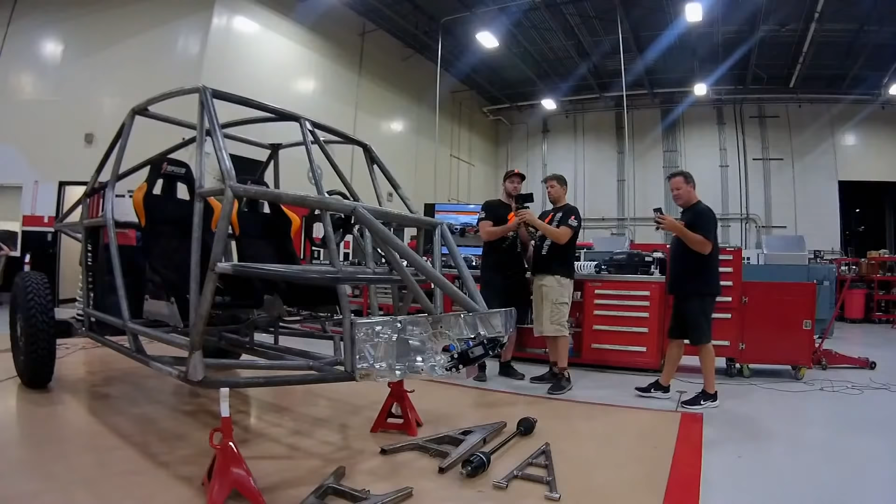This is a pre-production prototype part. Obviously a lot of engineering, a lot of things are put inside of it. We've got it split in half here, so you're actually looking down through the inside of it. You're looking at half of the steering rack. This is actually the steering rack that'll be on the Speed UTV. Hydraulic steering rack. And the reason for hydraulic is I believe that is the best way for an off-road application. The electric power steerings are getting pretty nice, but to be honest, the speed that this car is going to go compared to a normal UTV, we're going to need to have a little more stuff there.

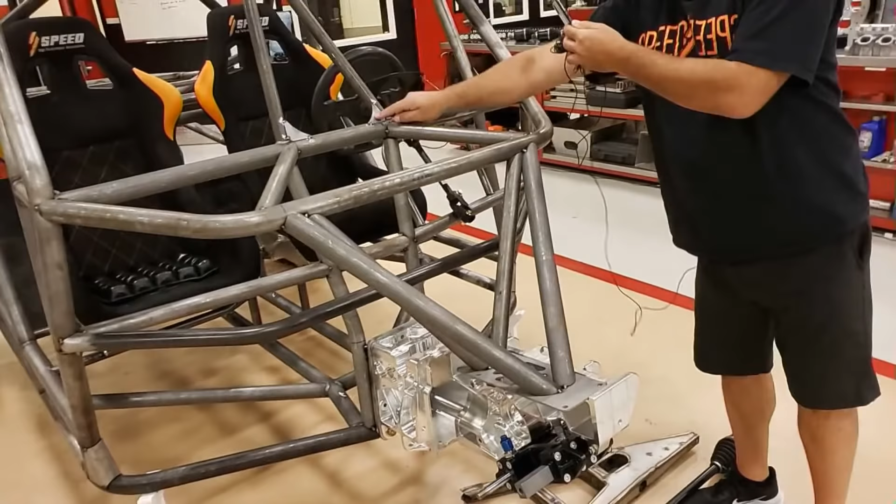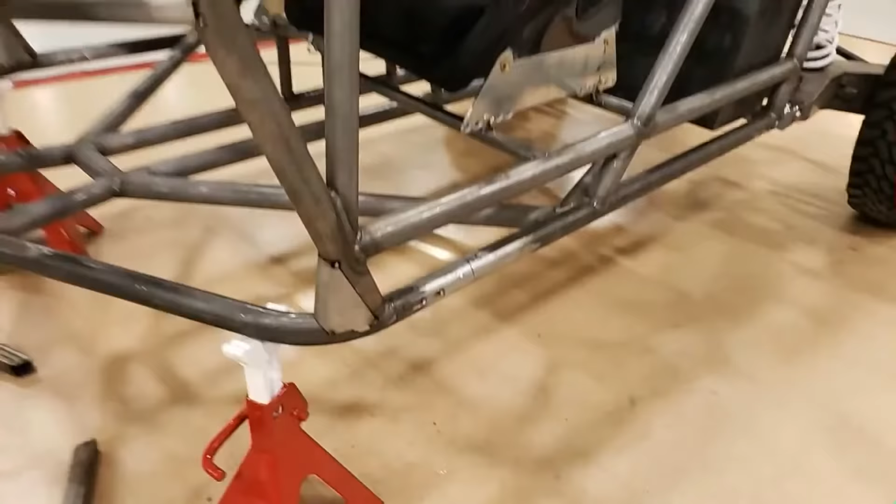One thing I'm going to walk around is front suspension. If you look at, we talk about chassis geometry, gussets, spine, the way it all links together. New to the UTV industry by a long ways is the A support bar, the A post being linked together and tied together. Big door opening. Daniel, want to grab this? I'll climb inside. This is what the production UTV will be.

As I go to climb in, I'll be able to come through the side door. A lot more room with your feet getting in here compared to what we did with the XX. But foot is definitely down low. The door will hinge off of this pivot point right here, swing open. A lot of room, a lot of headroom, a lot of comfort. Seats are mounted, as I said, there's a spine down the middle. A support bars, you look at this one, where are the tube connectors at? No tube connectors here. This is a purpose-built race car, but it will be the same as what a production car is. And this roll cage has been approved through Bill Savage.

With the exact gussets, yes. So the exact gusset kits, the way they want to see them. Corner roof gussets as well that hold on the roof. Feel really, really good about this car. These are the production RG seats, the seats that come in the RG edition. This air pad over here in the passenger seat goes inside this bottom seat cushion. And a lot of room, a lot of comfort. As you see, I will be reaching for full throttle. Lots of leg room. We've got a lot of dash room, but a very detailed out dash as well.

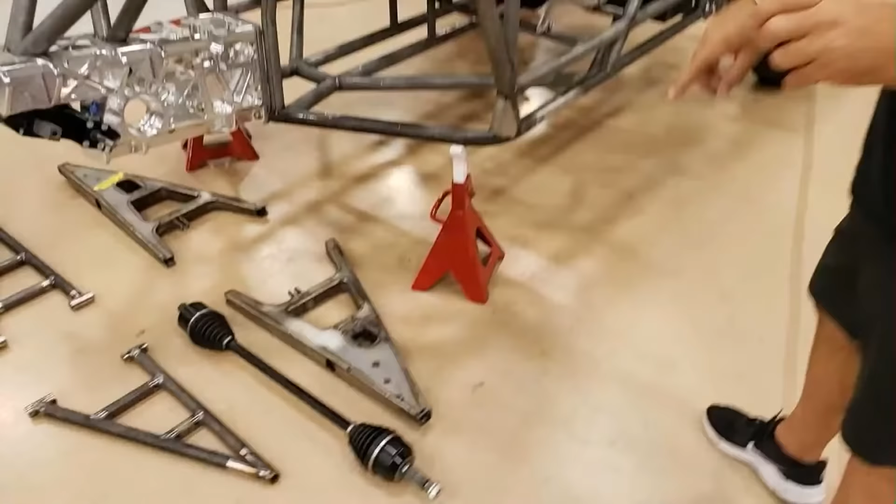Take my phone back. Walk you through some suspension components. So all the suspension components here, the outside misalignments have not been put on here. Waiting for some forgings to come in. Hopefully they'll show up here in the next couple days so we can finalize the lower A-arms. Axles are in. This is the big spline front axle to fit into the front diff. So that big spline on that locking mechanism.

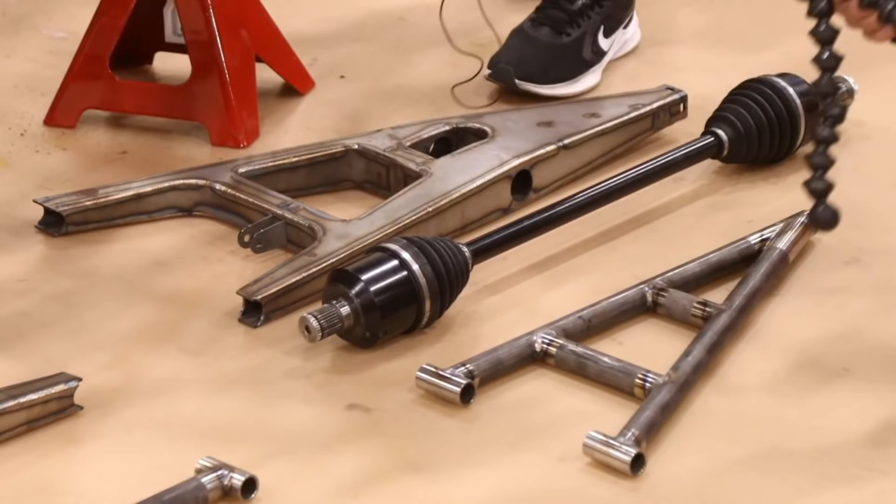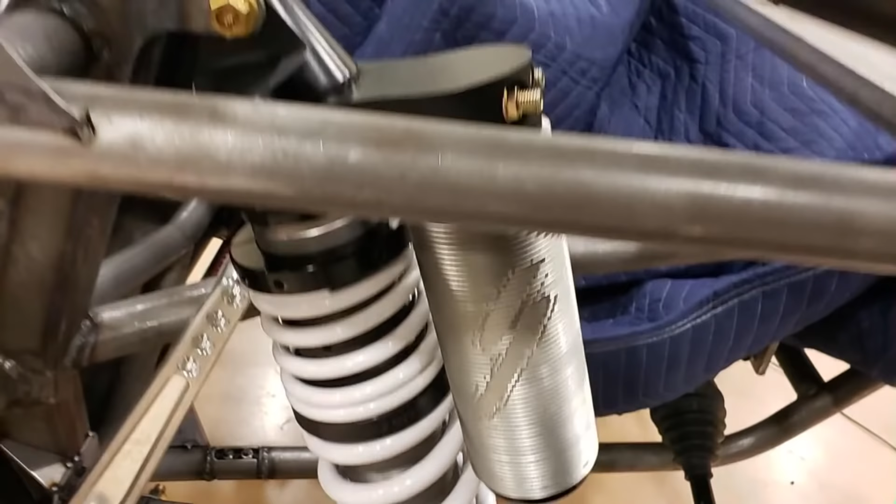Okay, pause, came back on. This one here has the fuel cell in it. This one's got a carbon fiber fuel cell tank. Anti-roll bar is mounted in this car. That will get adjusted down to where it belongs. Shock got put on before it dropped down. A-arms are on. Speed shocks. We do have pre-production shocks now in our possession. These are the production cast or forgings and extrusions. This is our finned reservoir.

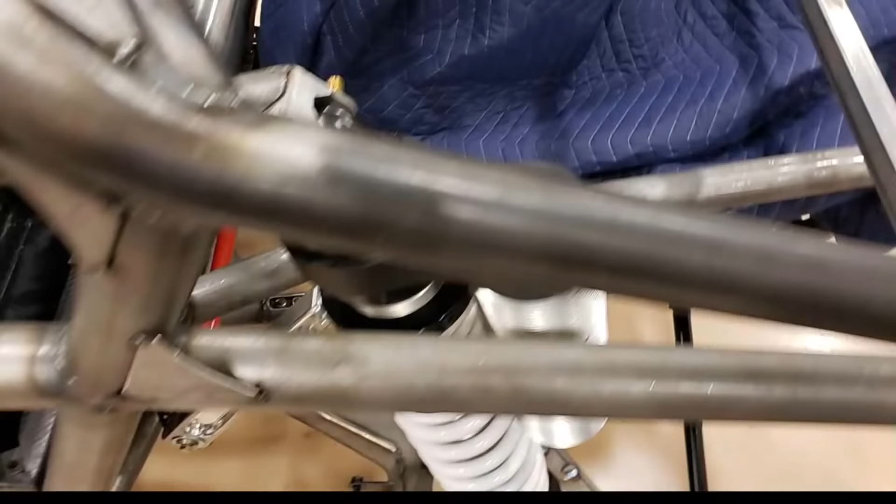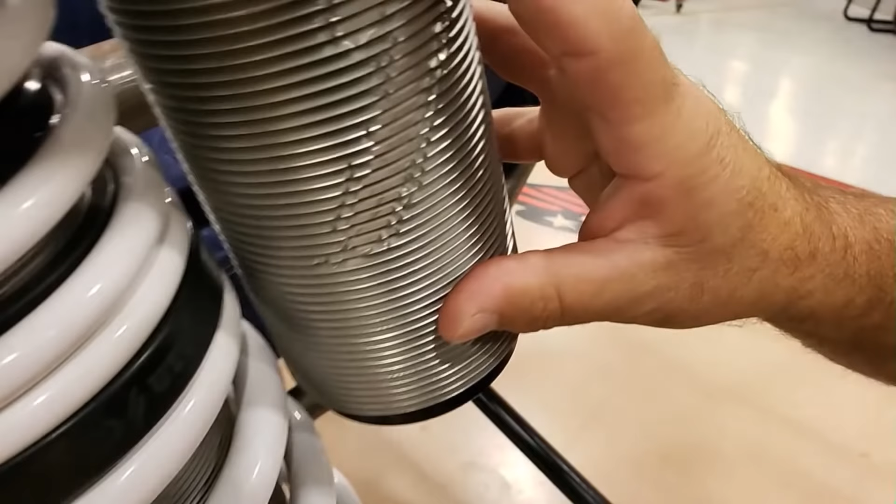Got to be very careful here. When we sent over the drawing, we sent it as a laser etching. This got actually machined, and pretty impressive that they went to the detail to machine the Speed S into the shock reservoir. But this is the shock that will be on the Speed UTVs. Black is a pre-production color. Orange will be the color of the Speed shock. That's the way we'll launch it on these cars.

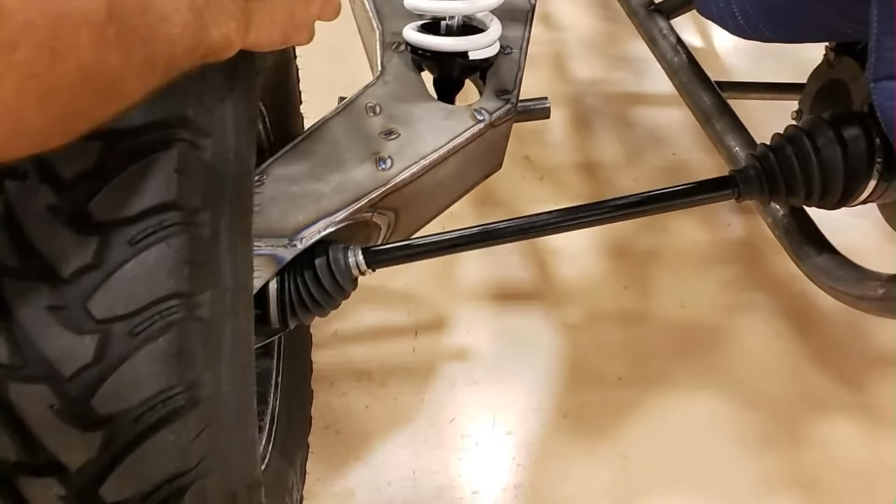Sway bar mounted back there. Double shear into the center of the trailing arm. So trailing arms are flippable. We're missing our shock pocket here. We know that when people question us. Shock pocket's not in here. We still got another 3 weeks before this car ships, but want to let you know that it is coming along. No, I will not uncover the cover. That is our engine, pieces of it mounted in the car. It's in a stage that we're not quite ready to share with you yet.

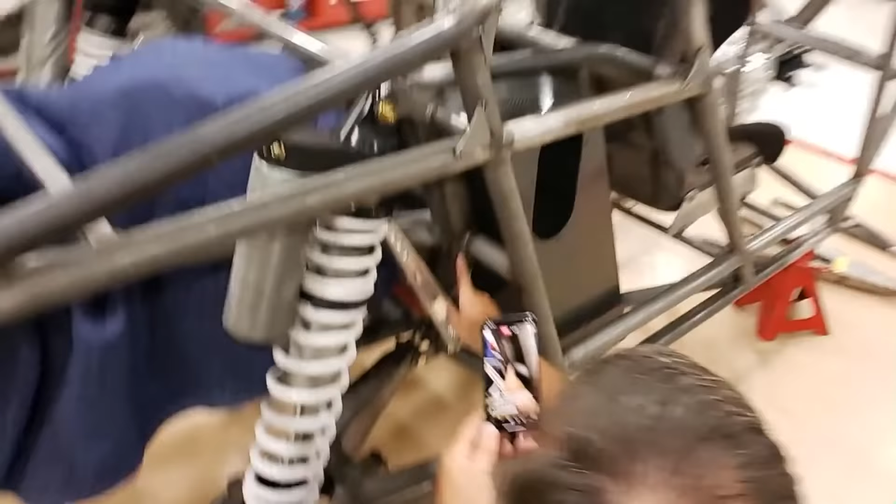Shock mounts. These sheet metal gusseted shock mounts will be in the production cars. This chassis is identical to what a pre-production car would be. All right, tube clamps are missing, but they will be in the cars, and they will be legal for King of the Hammers Racing, Score, and Best in the Desert, provided you weld up your seams. So they will be available.

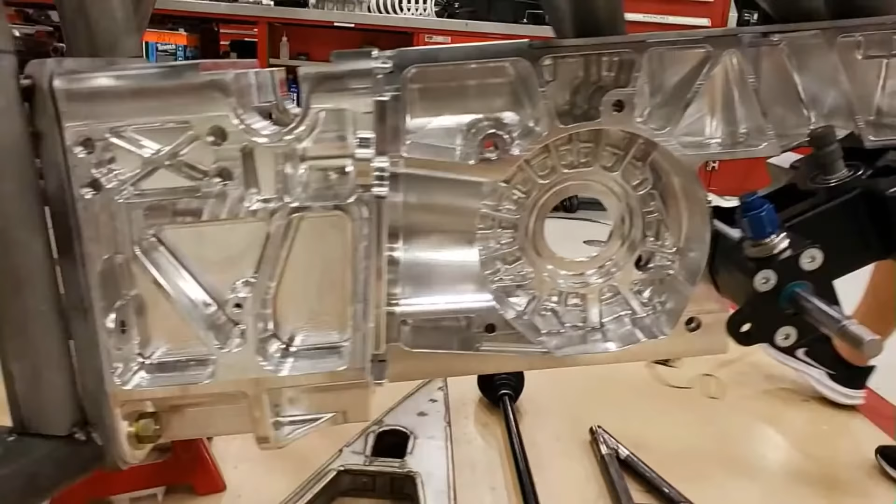So this car here is pretty special. I'm pretty excited about it. Like I said, I'll walk you around the front differential. This one's half, still waiting for that half to get to us. It was supposed to show up, but didn't show up. So we're waiting for that piece and all the internals for this gearbox. But it has to be running by UTV Nationals.

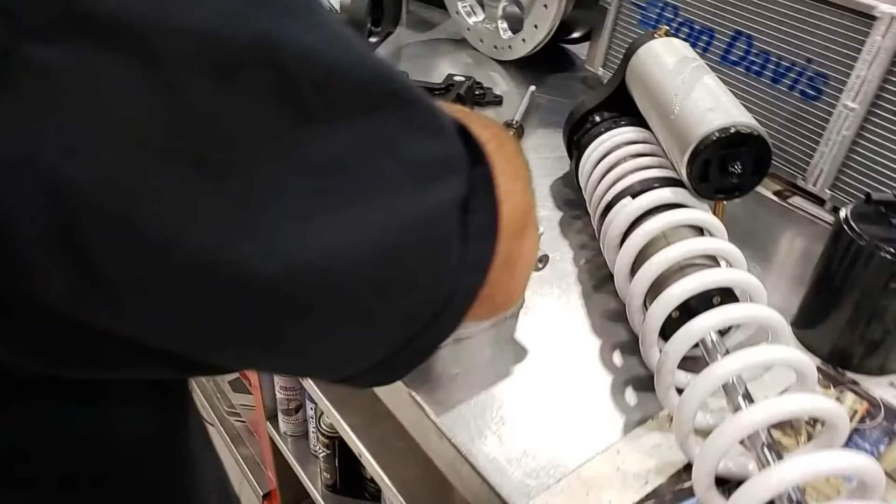Got to have it. How much horsepower? How many seats? Depends on what we feel is reliable after dyno testing. I'll have some engine stuff for you this week. Pretty excited about this. This is the machined cylinder head for the Speed UTV engine. You see the exhaust ports are machined.

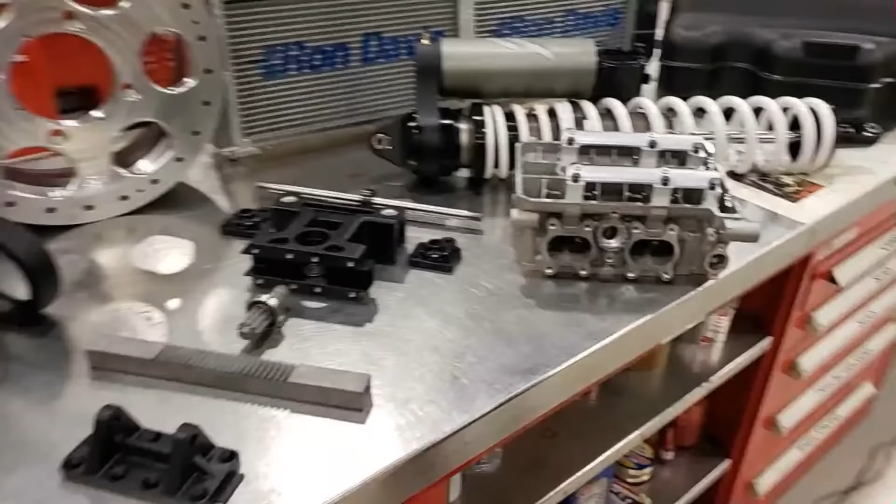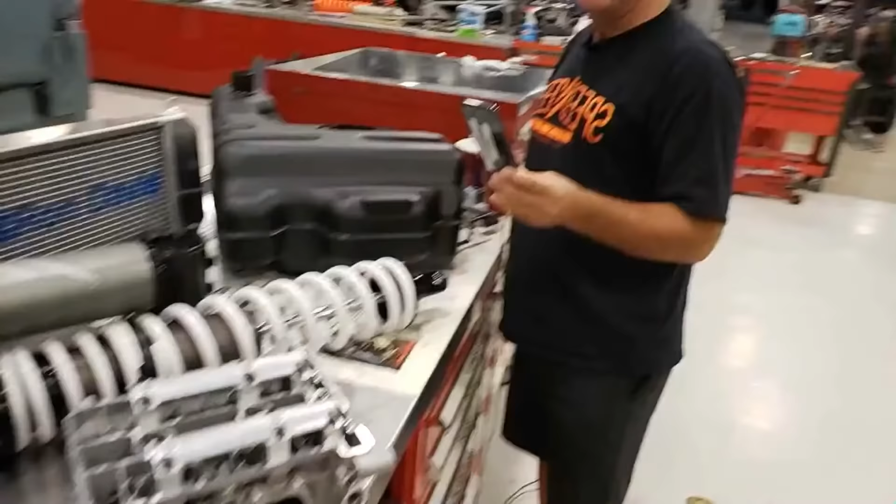So this will go to Joey Arrington tomorrow, who's doing our engine, as well as one will go to Craig Campton over at Hypersports. They are working with us on our production engine, as well as our pre-production testing stuff. How much power? Easy 300. And yes, they're 999cc, and we are pro turbo legal. So 300 horsepower, 3-speed sequential gearbox, no CVT.

Buddies at Ron Davis, this is the radiator for this car sitting behind me. It's here. This is the charcoal canister. So we do have our charcoal canister now. That is in a car at EPA CARB testing. This is another one of the shocks sitting here. So we've got plenty of parts and pieces.

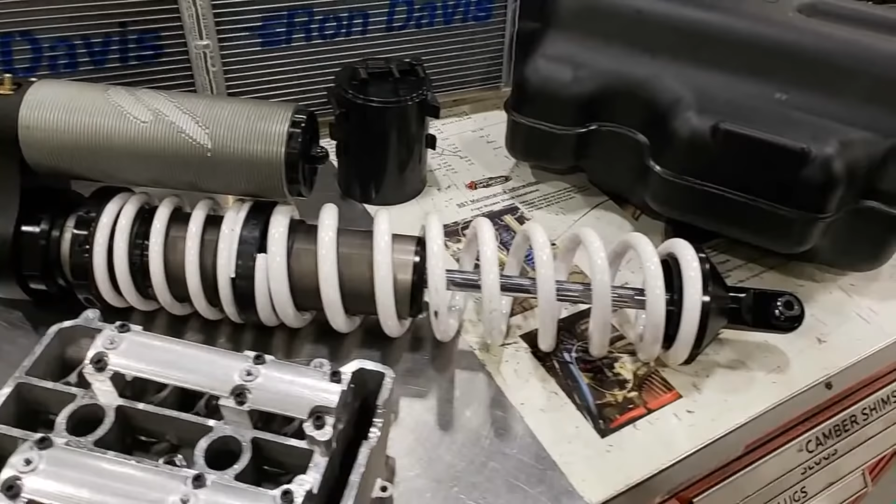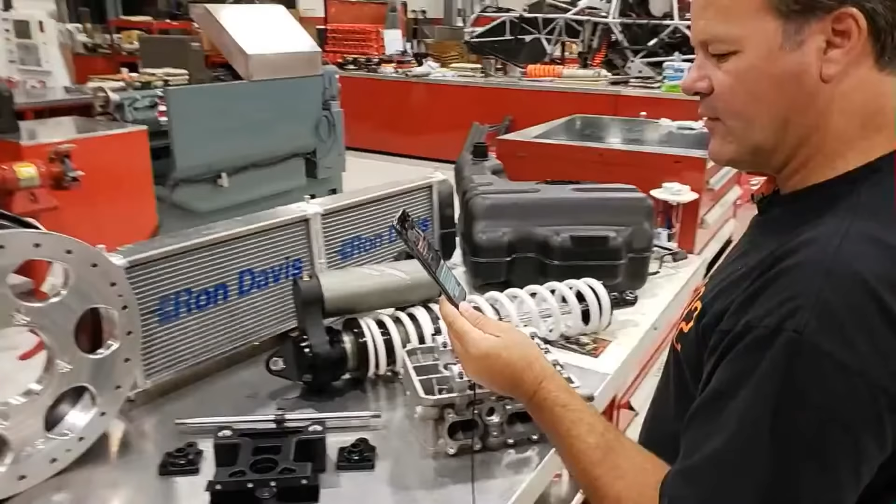What is the pattern and offset of the wheels? Well, the pattern is 4 on 156, and the offset is what we call what it should be. All right? If you're going to design a car and you're going to get proper kingpin inclination as well as steering geometry and maximum CV angle and length, you'd want a wheel like this. I started this flat face program with the Arctic Cat XX, and we took it a step farther with the Speed UTV. So 4 on 156, 6.5 inch wide wheel, 32 inch tall tire production.

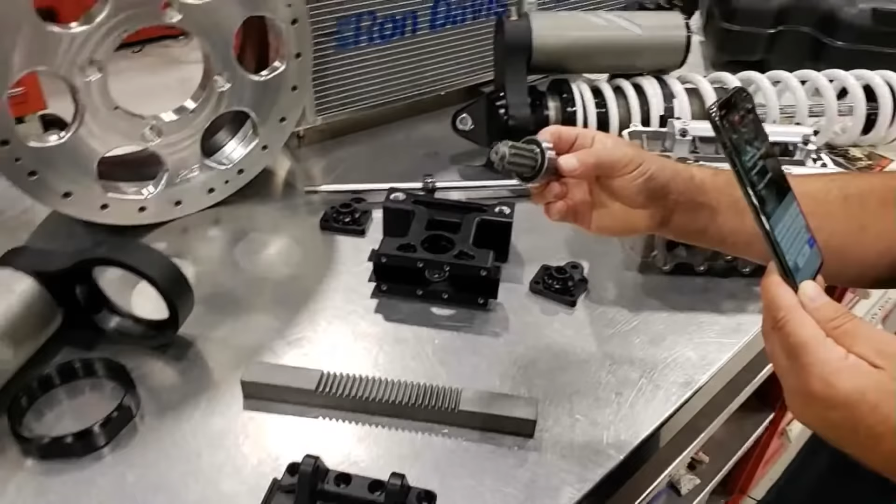Steering rack, hydraulic. I'll come over to the bench now, start showing you some components of the hydraulic power steering. Those are the 2 shafts and the piston. End caps. 1.75 to 1. We'd love to have 1.5 to 1, but we had to make a car that everybody could drive. I think 1.7 is still faster than anybody else in the industry. This is the steering rack. Steering rack looks a lot like a baby SST rack.

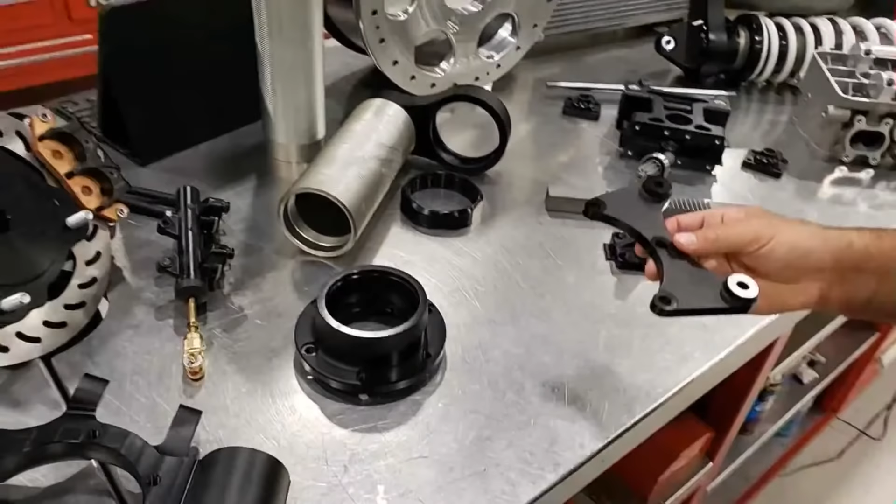As we're producing parts, we want to build stuff that's good. These are machined now, but those will be forged brake brackets. Nice part about this is these are some of the components that I wanted on the Double X that I lost the battle with. Nice thing about this is you can put this onto the hub assembly, and if you ever want to put 17-inch wheels on it, you can build bigger brake hats without building a whole assembly. Or you want to go to a Brembo or a Wilwood caliper, bang, all you do is do this.

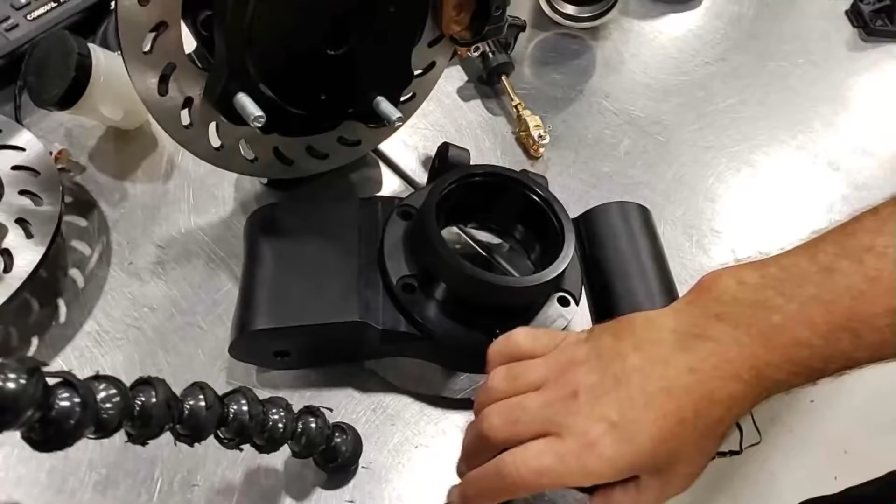This is the wheel bearing assembly that actually pops into the spindle. And the same hub assembly can go, whoops, on the back side for a right spindle and a left spindle over here. You see that the whole thing flips, the steering arm stays there. This is a complete production spindle. So when you look at the spindle and you say, wow, that's a really nice aftermarket component, that is our production spindle, guys. Double shear, front steer, patented. No ball joints, big bearings, same hubs front and rear, same bearings front and rear, brake caliper remote.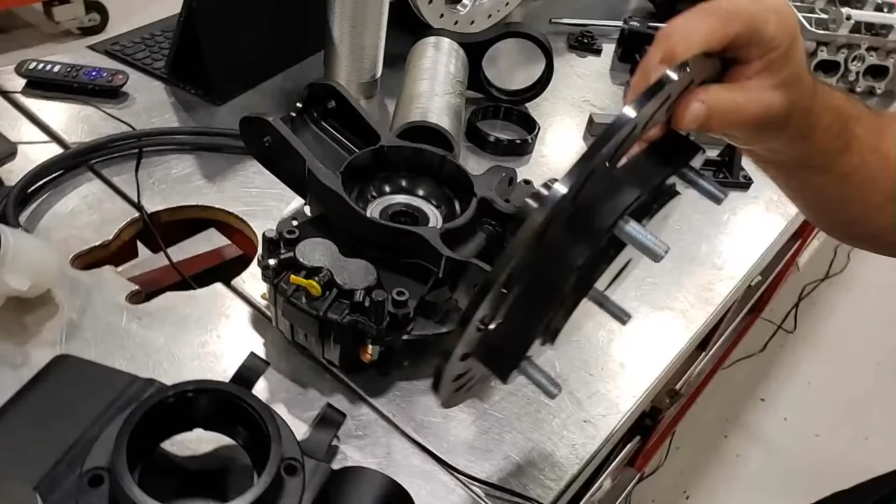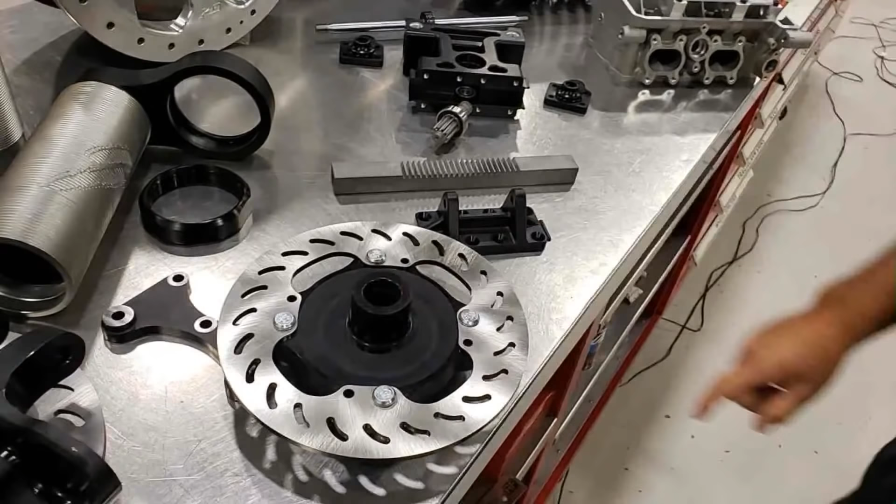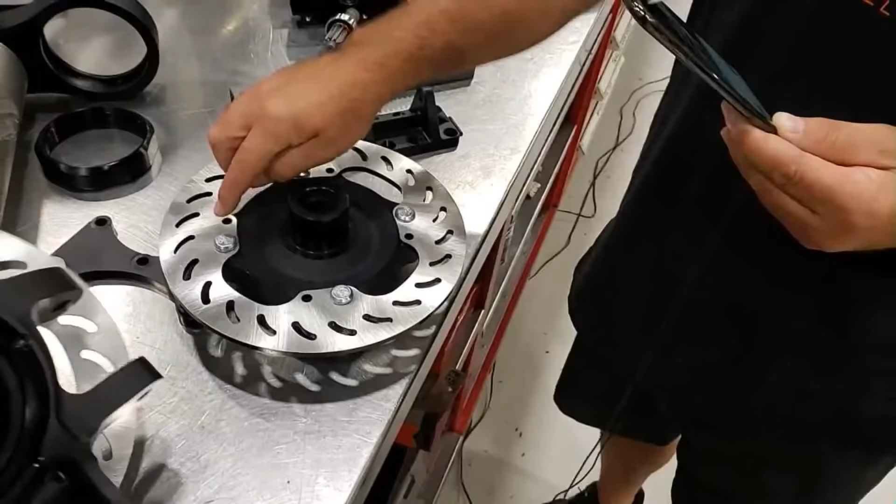Here's one of our aluminum forgings, aluminum forged spindles. Hubs, sorry. I call it a spindle too because the hub has the spindle built into it. So I get questioned on this, that's a hub. Well, not really, that's a spindle. So it's a 2-in-1 combo, something we learned a few years ago, and we have tied it in. Yes, we will get questioned on this one, but yes, we do bolt the brake rotor to the hub. As you see, we have bolts right here, so this is bolted.

I know that I got some stalkers over at Polaris checking out our videos. I want to make sure that you know that we are paying attention and that we have a good legal support team as well, keeping us advised in the right direction.

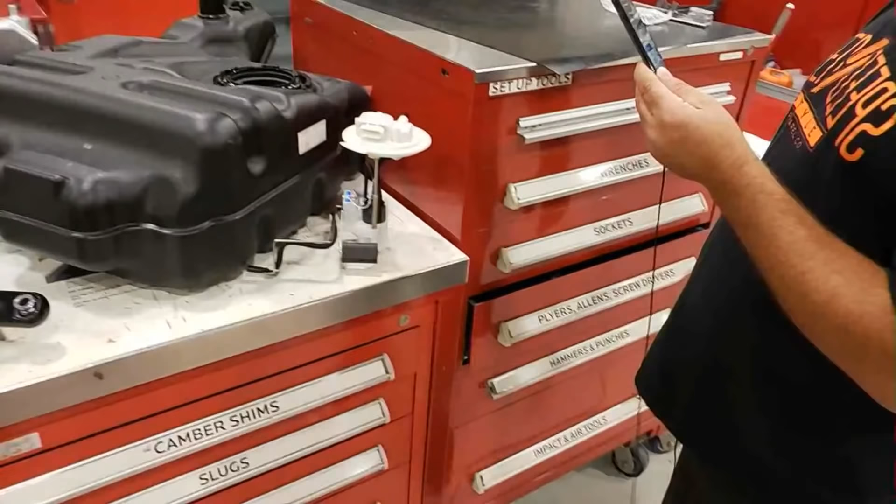Production fuel tank. So we have our production fuel tank. Production fuel pump assembly. Canister drops in, fuel pump mounted the right way, little baby Hydramat at the bottom, pretty trick, pretty sexy. And this fuel tank has a lot of fuel compared to other UTV manufacturers. And we had to do that for 2 reasons. I'll get into that at a later date, but I believe we're going to be somewhere around 12.8 gallons. We'll give you the exact amount.

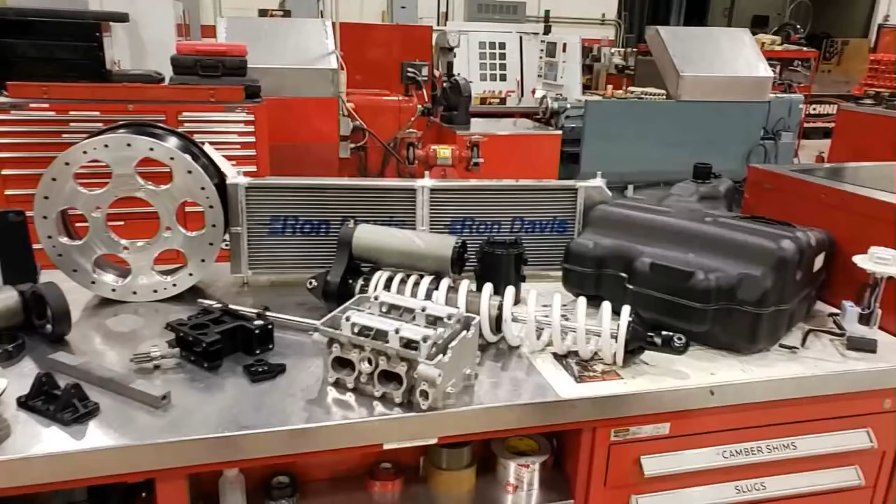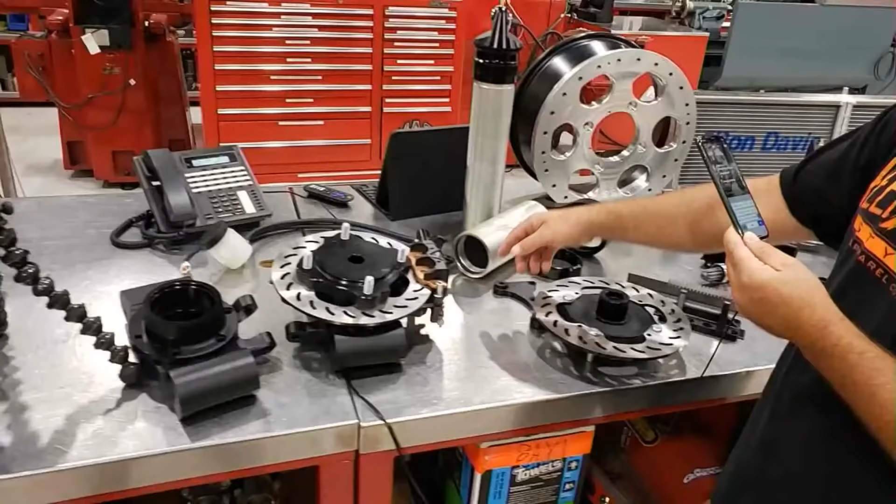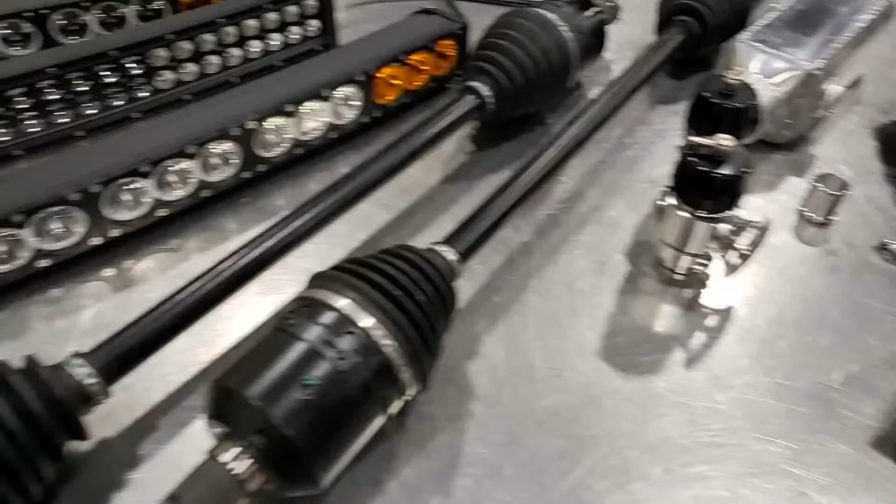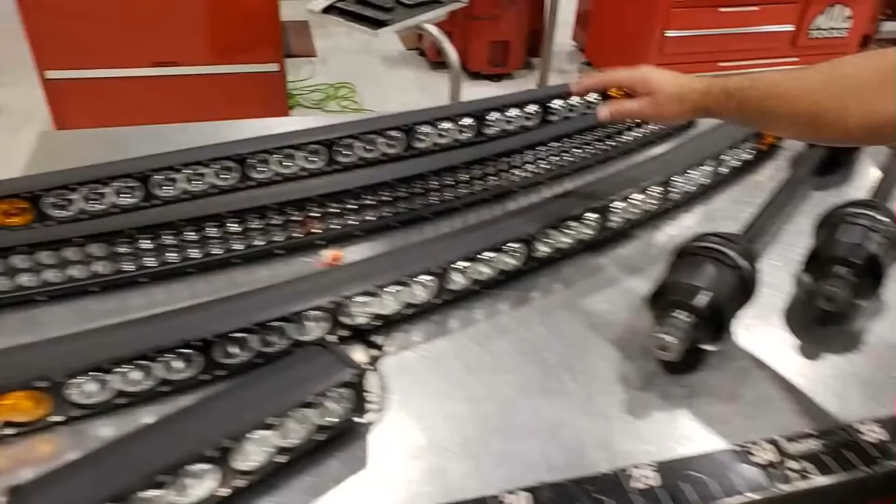Turbo. We've got a relationship with Ken from Push Turbo on our turbos. And there's the turbo, throttle bodies, brake caliper, wastegate, gears, lights. We'll talk about lights tonight as well. Got a bunch of new speed lights available, curved and straight 50-inch, as well as our original speed light. But we definitely have an upgraded light. Last night I did the test myself. Wow, what a difference. Great product. Looking forward to having you guys tell us your opinion on that as well.

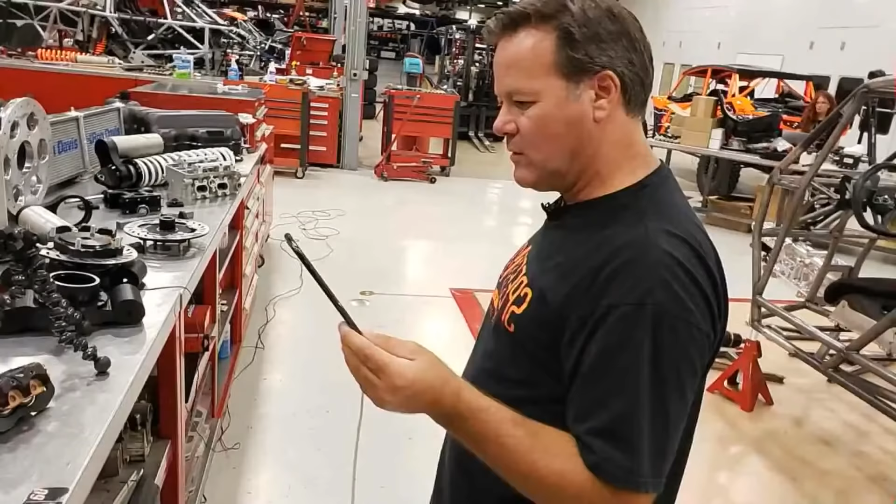All right, what did we forget? Seats, carbon fiber seat. This is the RG seat, carbon fiber. This will be available. Carbon fiber fuel cell for the guys that want to go racing. We'll have 33 gallons of fuel behind the seat for the Speed UTV. This tank will not fit in the Bandit. It would go in a 4-seater as well. It would drop right into a 4-seater, but it is ideally made for the UTV because I believe this is the ultimate race car and package for a race car.

Don't want that. There we go. Had a pop up. Let me see. I'm looking through some of your things.

What about clutch? Next we're supposed to see clutches tomorrow. So next week we'll show you clutches. Really, really happy with what Ray and Dennis are putting together for us, and got some cool parts.

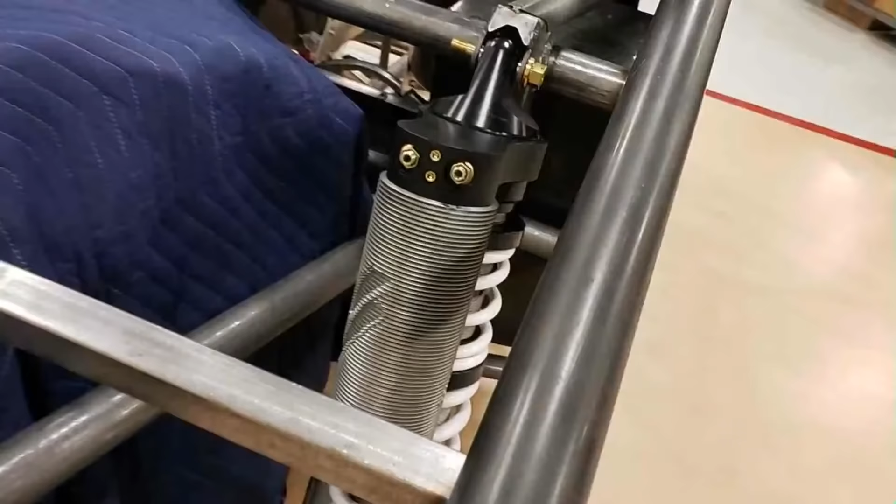But looking in here, adjustable compression and rebound in the 360-degree spinning reservoir. Same shock, all four corners. If you wanted to knock the shock reservoir over, you can knock the shock reservoir over. As you see, the shock reservoir will slide. Obviously, it's not tight right now, but that is a spinning shock reservoir so that you can position your shock where you want the reservoir to be just by loosening up this big nut right here, spinning it down, clock your reservoir, lock it down.

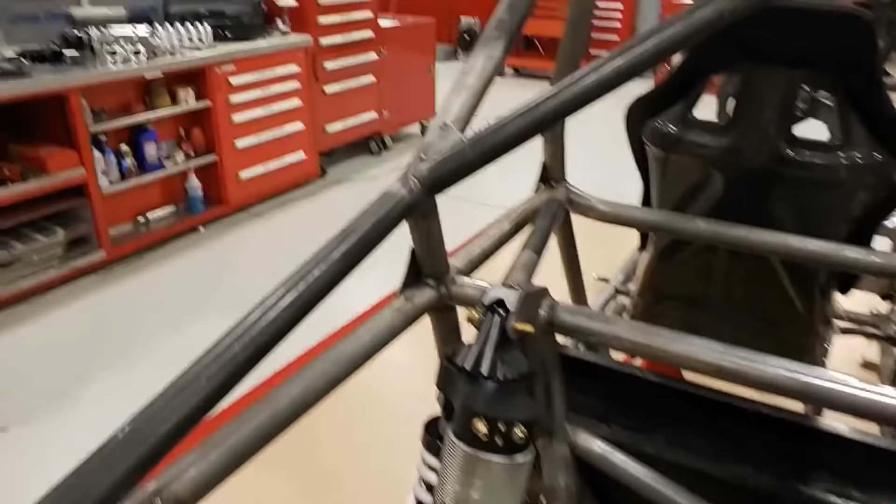What year did you develop that? About 2004, and then my boys from Fox copied it. Maybe a little earlier. Will there be a parking brake? Who wants to park when you have a car like this?

I know they do. I want to show you too, but we have showed you so much more than any manufacturer ever in this industry. I've never seen Polaris or Can-Am unveil their 2021 car in a position like this, where you can see all tube intersections, all tube junctions, gussets. Safest car in the industry, for sure. You guys are going to have to be smart when you drive this thing. This will be the fastest UTV easily in the industry.

Are the what? Jack points, part of the build? No, because jack points hang down, they would be drag points for us. So jack points will not be part of the build. Bracket for holding the jack, of course. If you bought a jack, we have a speed accessory. And if you bought a speed accessory jack, you would obviously have to mount it. You're not going to just get it in a bag, thrown under the seat in the passenger side. We'll have to mount that for you.

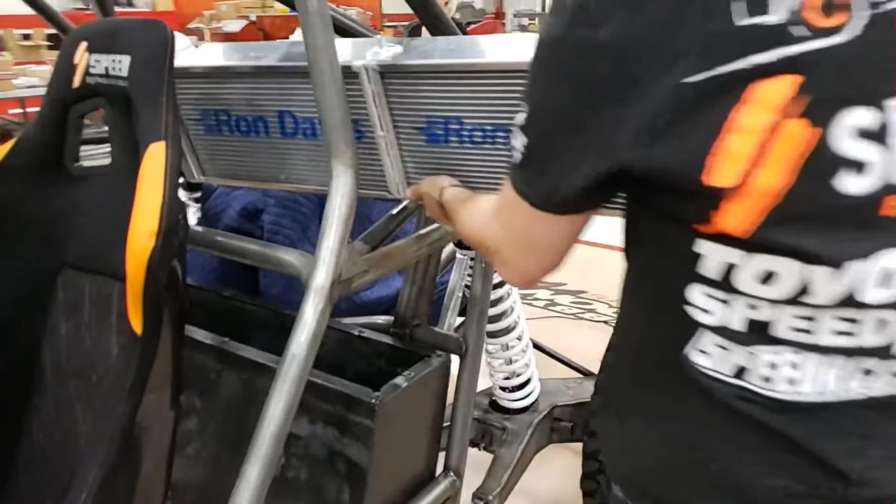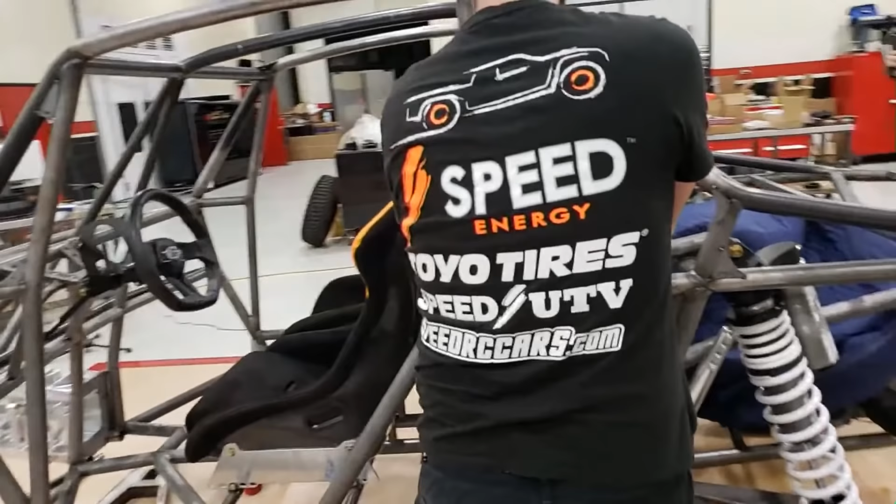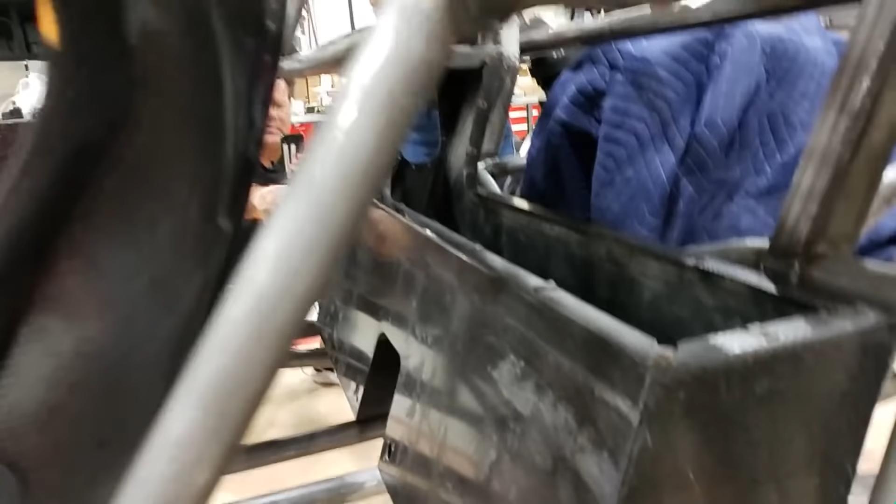There we go. Radiator is going to sit in there about that angle. Down a little bit probably. Probably right about right there. The radiator will be sitting in there right there. There's not room, so we come around this side over here. And in this area, we'll have a door that'll open up on the UTV and you'll be able to get storage under the back seat. So there'll be additional storage inside the car.

In this area here, there'll be another door. This back door will be a small door that will open up in that section right there. That'll fling open, you'll be able to get in there. Remember, no production cars come with the carbon fiber fuel cell. That would be an accessory option. You guys can go ahead and remove that, thank you. Let's go ahead and pull the fuel tank out of it as well. Daniel, if you could pull that out through your side.

Unfortunately, we're a little high right here. We're working on this, and the next one will move down just a bit. Out through that side. Our friends over at Pyrotech, they build the bladder. Now, it gives you a little more idea of what room there is. I want to grab the other fuel tank and throw it in here. We'll put the production fuel tank in here and show you guys. I just don't know if we're going to get it in with our race car seats already mounted the way they are. We'll give it our best shot though.

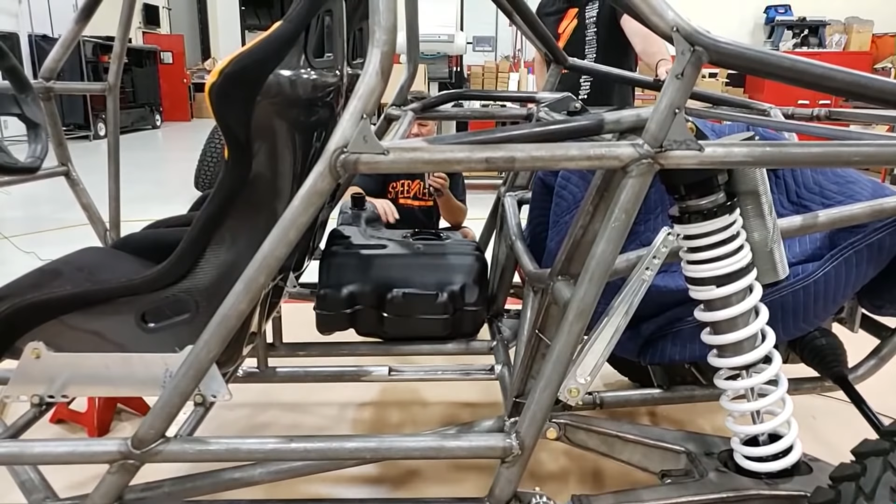Sway bar is going to get in our way. Yep, sorry, that's not going to go in. So you can set it in there sideways for us, just so you get an idea of how much room it's going to take up. Why don't you just pull it out this side. Just let the end hang out over here. There we go. It's got to go in that way with the sway bar mounted in it. That's a race car sway bar.

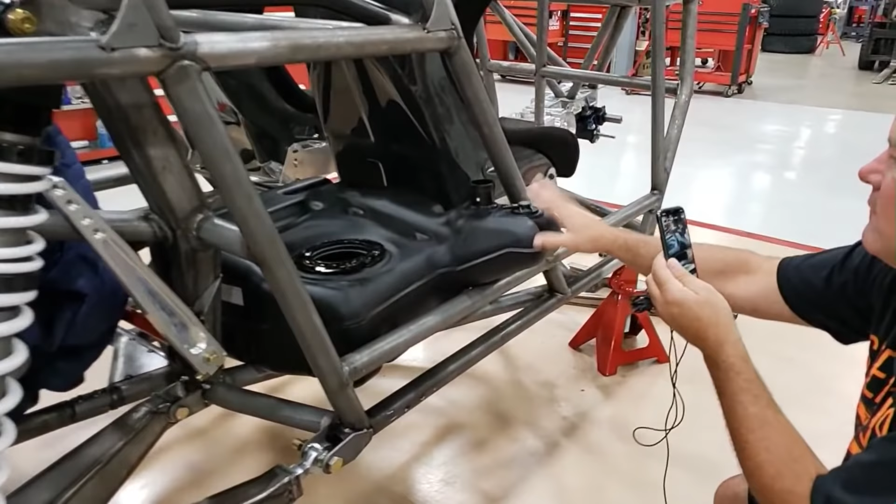Production one will turn down the inside over here and be a little closer. Still go to center line, but clears this extra snout for the fuel tank. But that's about the height. So on top of this will be a little flat panel. You will be able to have all this for storage on this side. And I'll get into our show here shortly. But as we walk around the other side of the vehicle, this area is all open, if you didn't run one of our fuel cells.

So imagine a door opening here, swings open, big access right here, storage behind the seat. You go camping, you throw your sleeping bags back there, and then you still have the most storage in the whole industry with the bed.

50 by 48 bed. Opening tailgate. A place to sit and hang out at Glamis, you know? After last year, climbing into the back of the double X, at least I had a place to sit. The guys in the Polaris and Can-Ams, they were sitting in the... hanging on the roof, doing whatever you can, but this is our... what's that?

Are we hiring? What do they do? Ask if we're hiring. Machinists? For sure. Going to have to ramp up the machine shop around here. I can see that. And really excited with all of our suppliers, though. Just a lot of components. There's a lot of aftermarket accessory components available on this car.

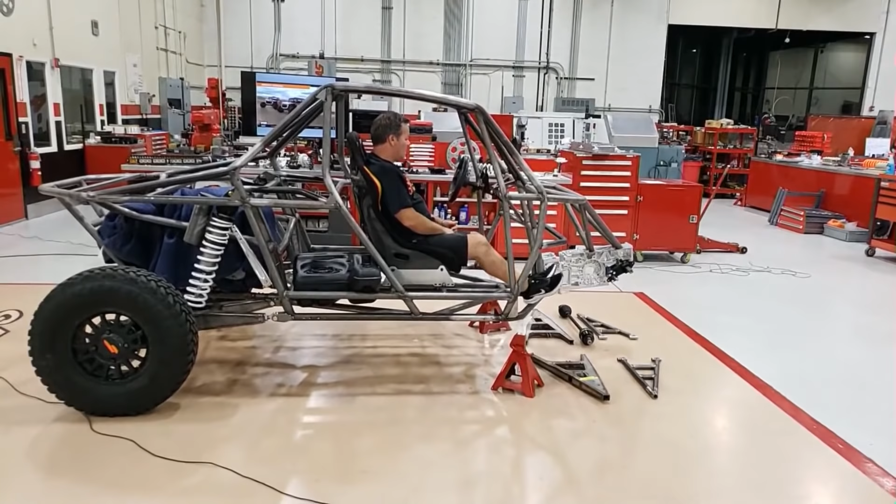There it is. Step back. I'll look through the door opening. Massive door opening to get through there. I don't know if you can hold my phone. And, yeah, I'm going to disconnect. Bang. Kind of slide in here. Look at this. Easy to get in. In the car, boom. Tons of leg room, tons of dash room. And these seats can go back another 3 inches from here as well. So I feel good about where we're at. Feel good about the roll cage.

Very excited about the Speed UTVs. We have killed it, literally. Burn the midnight oil is an understatement. The sun has come up many nights during this build. I guess that's morning, right? I'm going to give you a quick zoom in. I'm going to go take my stage, and we'll talk about tonight's presentation.

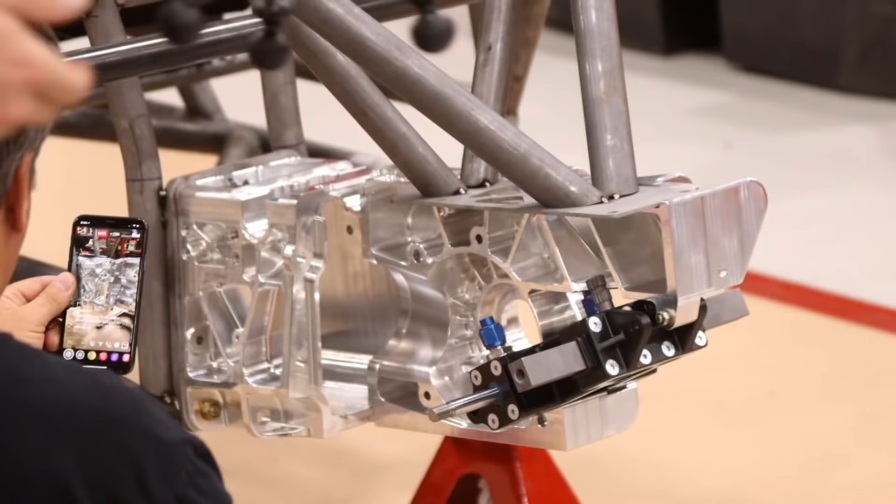Hydraulic power steering. When I get down underneath here, show the bottom side. Bottom side is just as nice as the top side. Question is, yes, there will be a skid plate. There's bolts here. Got bolts for a flush, thick skid plate, as well as aluminum stamping here to protect and tie these two structures together. Hydraulic power steering.

Do you recall how much kick in the front, front to rear? You want to grab me a tape measure real quick, somebody? The angle is 5.5 degrees. 5.5 degrees of kick up on the front angle. For approach angle, want to make sure we keep those front pivot points out of the dirt. The front pivot points are equal or behind the front center line. Big 32-inch tire. Beautiful parts. Nice job, Keith.

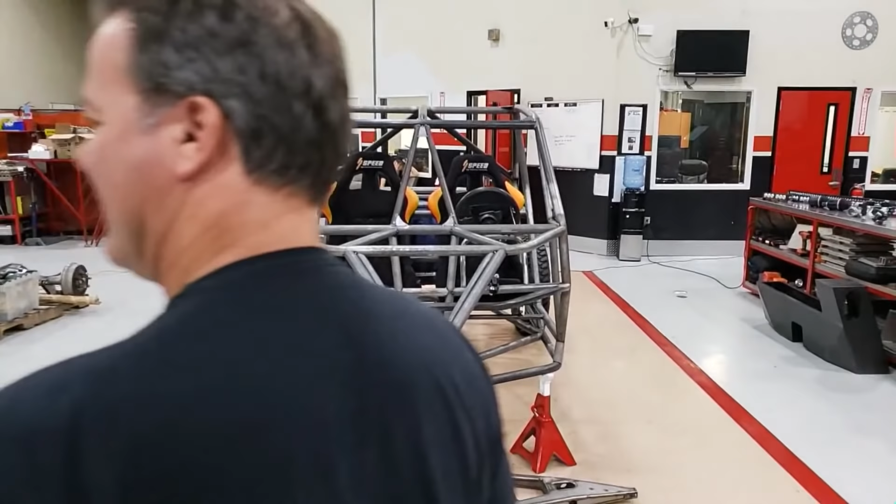Yep. Uh-oh, triangulation. What are you guys laughing about over there? We're trying to remind them to zoom in on your head. What'd they say? That bald spot, I know. You know that bald spot comes with working with you three. We're not doing it. You're not doing it? Trust me, I'm pulling my hair out over here, guys.

Great team. Honestly, I'm really, really excited about the whole entire team at Speed UTV. We've got a wonderful group of people working with us right now. Yes, sucking up just a little bit, across the board, from sales to Todd with his dealership stuff, to all the people out there doing sales, and our customers. Want to thank you guys for believing in us. And we are super excited about being in the industry with a new product.

All right, taking the stage. You want to walk around and hand it to me? Sure. All right, there you go. Take it. Let's do right here.

While you're getting ready, are the gussets to make the cage race legal? What's that? Are the gussets to make the cage race legal? Yeah.

Go ahead and plug me in there. Yep, perfect.

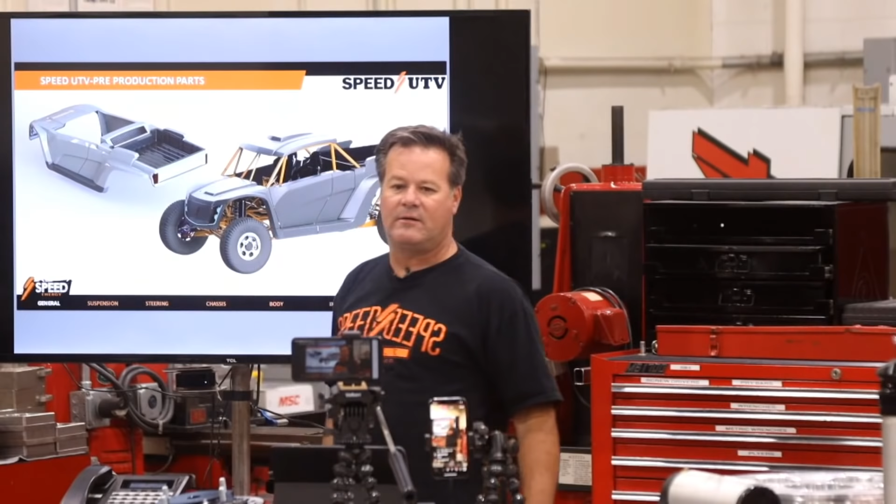Really, really excited about this component and these parts. I've never done this before. I think this is going to take CVT cooling, inlet, exhaust to a next level. Next level for sure, because all of it fits inside under this bed. It fits in here, flows through the radiators through there. Just really, really cool parts, really neat designs. And to be part of this design process has been fun.

I looked at this week, I'm on every night, anywhere from 3 to 6, and any other time we're glued in the shop or over at a supply house or over at the engine shop or over at Eichler's machine shop getting pre-production parts made to be able to get this thing done. And it's definitely taking its toll. They're giving me a hard time about my hair, but I saw a big gray patch pop out the other day too.

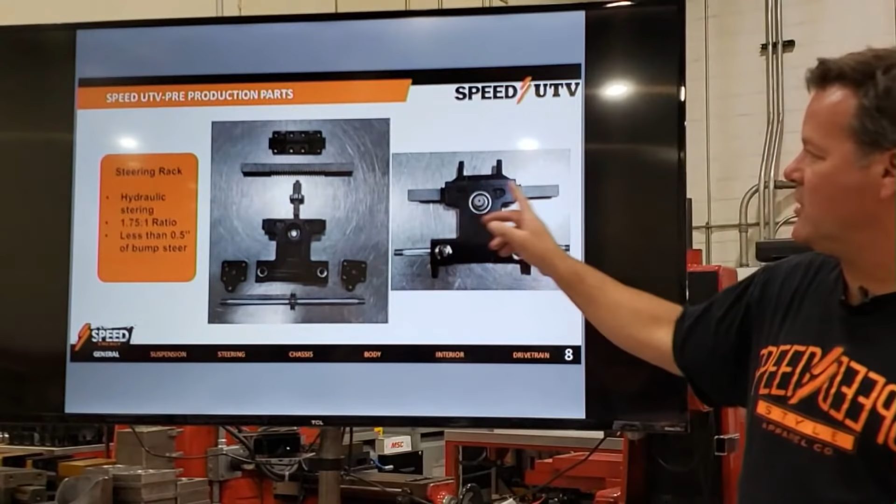Steering rack, hydraulic steering rack. I've less than a half an inch of bump steer, 25 inches of wheel travel. We all know at full droop on a 32-inch tall tire, this thing kind of tucks a little bit. They all do. There's no load at that point, so it doesn't really matter. The Unicorn does it. All trophy trucks do it at a certain point. And then you say, okay, that's enough. Could we get more travel out of the CV joints? Yes. But then this toe goes like that, and camber does all kinds of wacky things. It's really just not geometry sound.

So, we've had 25 inches of wheel travel in an off-road car for the last 25 years, and nobody has any more because there's nothing better to do until we came up with the portals on the Unicorn. And then you're going to say, okay, well, what about the portals on the Mason? I can tell you the portals on the Mason are nothing like the portals on the Unicorn because they missed a very, very unique, interesting feature when they did the design.

And we've got stuff that's different than them, plus our wheel weights are probably 70 pounds per corner less weight than what they are, so it allows us to follow the road and be a lot more nimble, faster acceleration, faster braking, et cetera. But the portals on the Unicorn are just very different than what everybody else has seen.

Shocks, spindles, we talked about spindles. We got spindles, uprights, hubs, bearings. Really excited about all those parts. Forged aluminum upright, universal hub bearing. That's this component. Tolerance too tight, didn't want to come out. That's this component here. Universal, goes on all 4 corners.

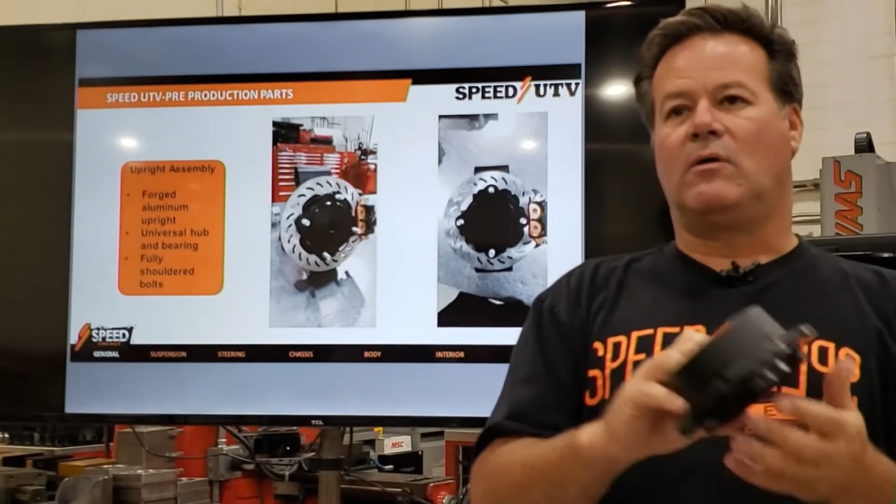So yeah, hand me that bearing. There's a bearing that gets pressed in there and a clip that goes in here. And thank you. This bearing, big bearing, goes in the hubs, pops into there, presses in there, gets a circlip. This hub and bearing goes on all 4 corners.

Pretty unique. Nice if you're going to go on big, long, 1,500-mile rides down to Baja and back, say you're going to do Ensenada to Cabo and back. You might want to carry one of those with you. You might want to carry an axle. Those are things you might want to do because there's a lot of people that go on adventures and they're going to use these cars for adventure riding, besides sand dunes, racing, short course, everything else. Forged knuckle assembly. This is the forged assembly here.

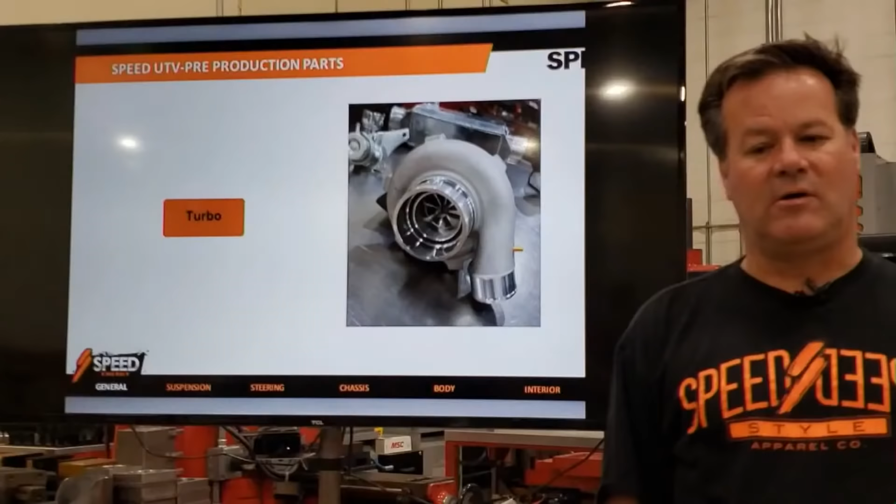The brakes, the Speed brake caliper, turbo. Like I said, we've got a relationship with Ken over at Push Turbo to produce the turbos for the Speed UTV engine. So yes, this is a shout out to Ken. I hope you're ready, buddy. Orders are taking off. Things have been really, really good.

Blow-off valves, filter attachments, horn style if you want to hear it whistle. You know, obviously we're going to make it as quiet as possible as a production, but people love to hear the turbo blow-offs as well.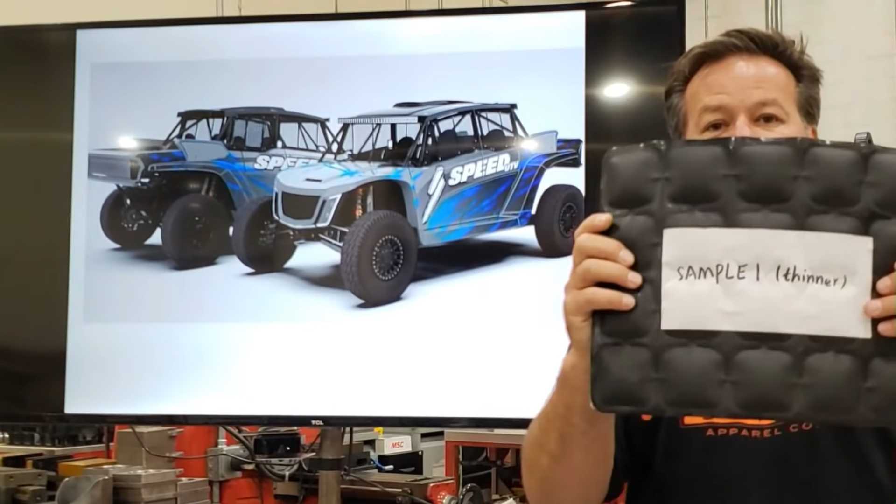Got some of these. Look at that. Sample right here. Thinner. We have made multiple versions of this to make it strong enough. All right, so this is one of the samples, but this is the air seat cushion that goes in the back.

Can I have the other cushion by chance? If somebody can hand me that cushion in there. Vanna White, could you please step up and bring me the air cushion?

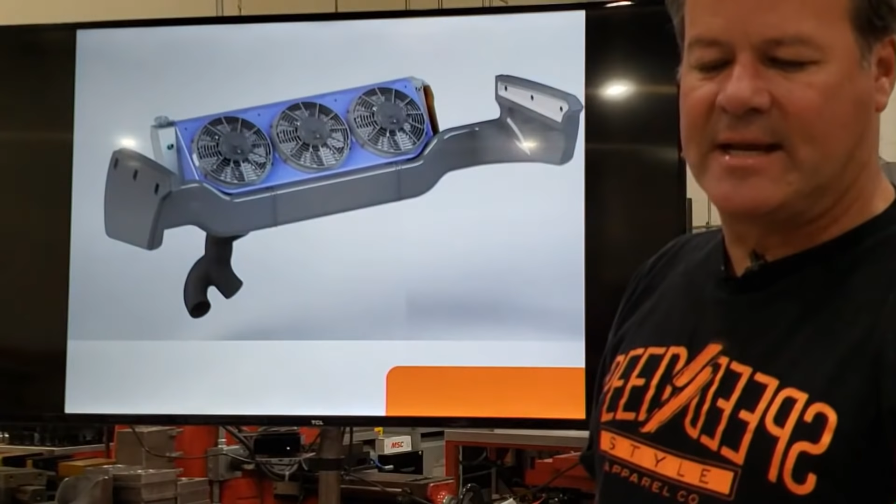All right, this part here is probably one of the coolest design components that we've made on the car. There's so many of them, but it seems like every time we're about done, we come up with a new feature. So this is a swivel that ties both number plates together in front of the bed. So this thing drops in, goes in front of the bed. This is the snorkel mechanism. The snorkel mechanism is used for air intake.

So now think about it. I'm going to drop back in my picture here. Everybody was giving me a hard time a while ago about number plates and why are we going to do number plates and what are the number plates for? Well, now think about it. At about 4 feet up, we bring in our air right here. At the highest point inside the car, we bring in the air for the engine and the CVT. Also helps us with dust, gets it up higher in a cleaner air position, but does not compromise the bed.

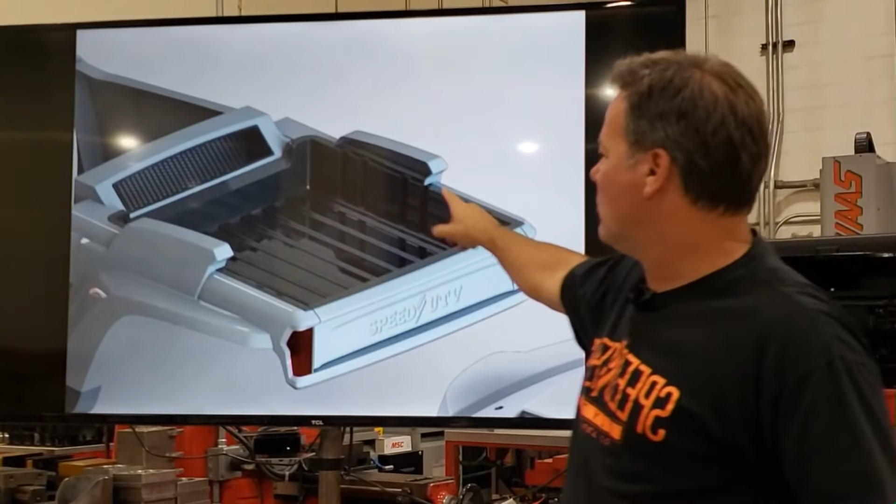So we're able to not compromise the bed, have nice smooth side air intakes, bring in the inlet air from these two positions here, which is a long ways away from the radiator. So people say, oh, you're going to bring in hot air. No, we're not going to bring in hot air. That air is going up. This air is coming down through the side. So air inlets, I'm going to drop back to that now. Are those the only pictures we're going to show them of that, or is there another one? All right, cool. Oh, there it is.

So there's the air inlets. Radiator's here. The radiator is virtually vertical, a little bit canted forward at the top, not a lot, to get the airflow the way it should be. Then it goes into the radiator ductwork that's angled up. So the radiator's not angled, just the ductwork's canted. Then the air duct runs below the radiator, so it's below the heat. Heat rises, so the cool air coming in is below the radiator, slides into here and goes into these two ports, which are the two CVT inlets.

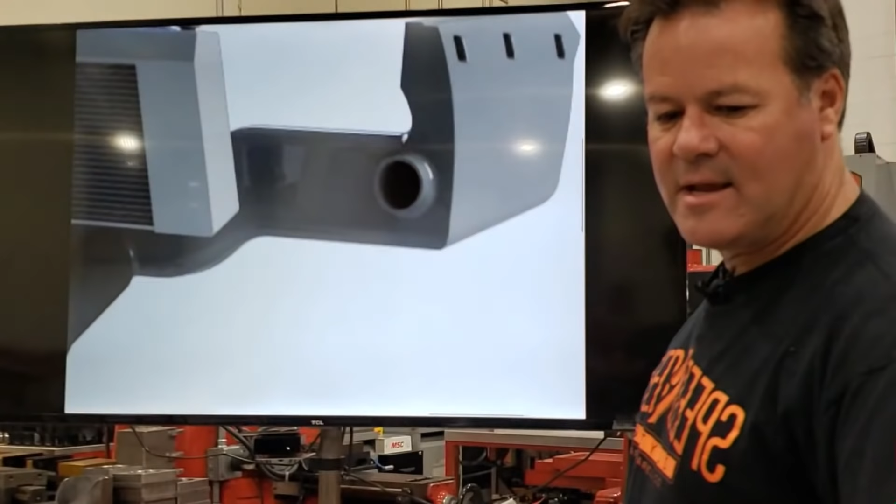But over here on this side, it drops in right there. That runs over to the air filter. So dragging clean air from the back of the car in a spot that was easily accessible to grab it. But when you look at this component and these parts in this form, it's awesome. So intake, clean. Clean air is green. We bring it in here. These have Frogzskin filters on them. Bring in the air, drop it into the CVT, drop this one directly into the air filter into the turbo. There's another side looking from inside where the motor would be.

Fully covered CVT cover that works as a front mount, rear mount to the chassis. We're missing the rear mount here on the side of the CVT cover. There's a rear mount here, so we hold it from both ends. Got other billet tie rods on the other side that hold our drive assemblies. So there's other features. Then it's on the inside. Obviously, if you wanted to race and you wanted to put another Frogzskin on the outside and get a little more air in there, you could. I don't think you need to. I think we're double the amount of air through our inlets than what the CVT and engine can suck.

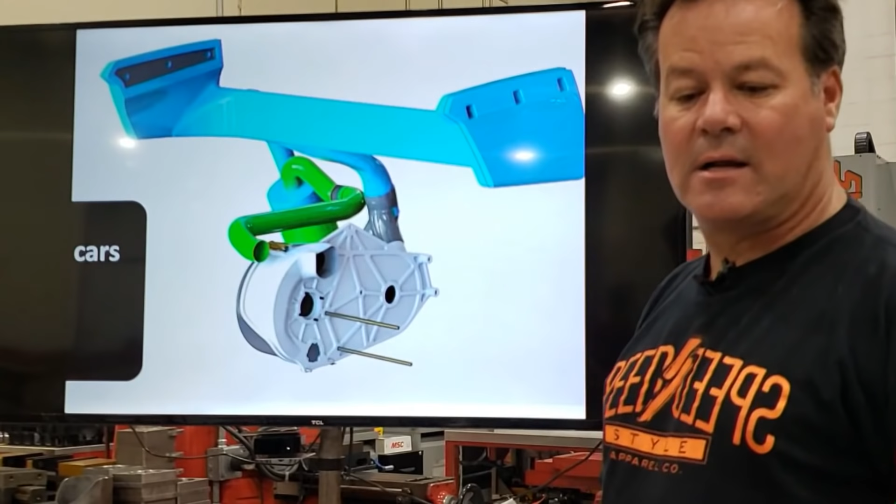So we're good there. And this CVT cover, I know we're starting to show you stuff that you haven't seen before. The exhaust comes out here and it goes into a big cold box that runs over the exhaust and cools all the exhaust and forces the air out into the passenger side of the vehicle. Big, massive fans put onto the clutches, both on the primary and secondary, inside, outside, with a couple other features that we have not shared with you yet, but there's more exciting things still with regards to the CVT, and that's why it's positioned in the right position to block it, very similar to the blanket.

We're just not ready to show it. We've got some patents already in place and making sure that we get our intellectual property tied together before we share it with you guys. So air intake, very unique, very nice flowing, very Ferrari, Porsche, Lamborghini style, brought into the off-road industry. Again, the highest quality parts on Speed UTV.

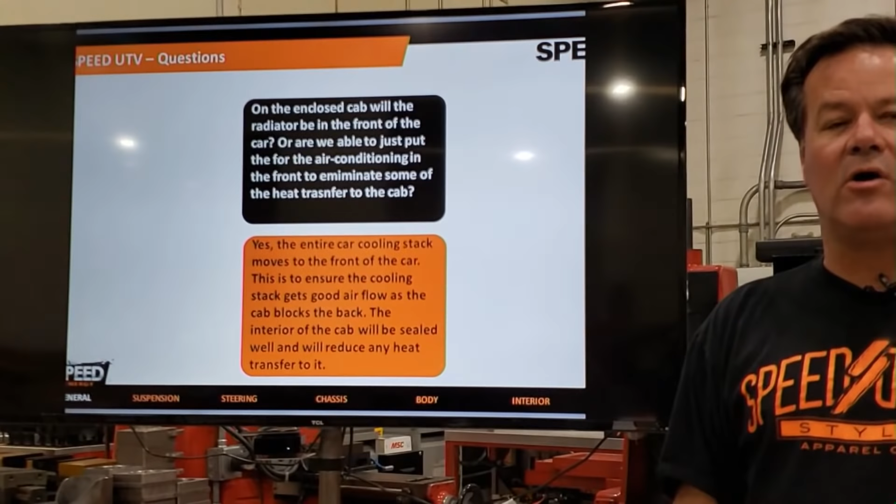Question: on the enclosed cab, will the radiator be in the front? Basically he's asking about the heat inside the car. We've done a very good job at trying to seal every access point inside on the front as your open cockpit car, but when we go to the enclosed cab, and yes, this has been thought out on this production vehicle, that's why the air filters are where they're at, so that when we put the sealed cab on it, the air filters are still in the right position, but the radiator will switch to the front. So the radiator's gonna go from behind the seats to the front.

There is room in the front, that's the front radiator opening area in the grille when you see the car come out. It is a big tall radiator, nice wide radiator with full ductwork all the way to the front grille area. There's a lot of reasons, but that's one of the main reasons why it'll be so difficult to take an open cockpit car and convert it to an enclosed cockpit car.

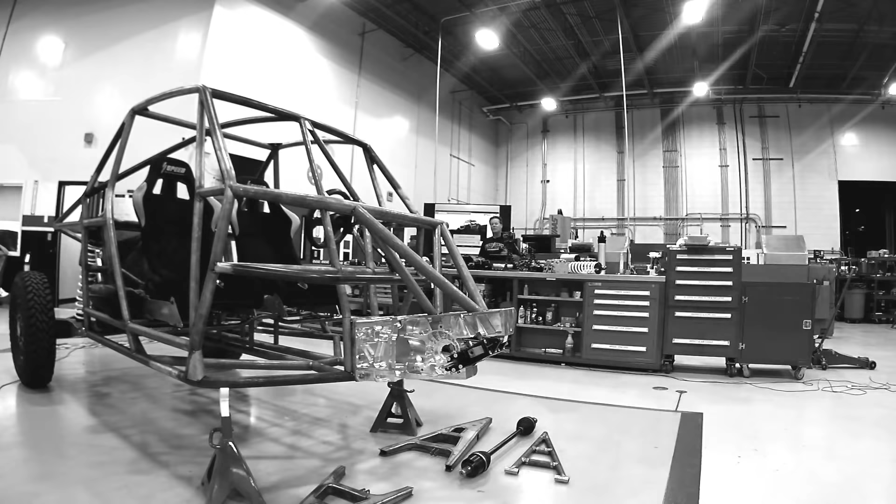And my way turns into not just my way, it's everyone's. A lot of you guys that are watching our shows for the last 25 weeks have said, have you thought about this or that? It's like, man, I did forget. A perfect example was the oil filter, the drain in the oil filter. So there are things that we continue to learn at every one of these shows. But we're now to the point where parts are tooled, things are happening, and we're starting to receive these things. We'll catch mistakes with the early ones, and hopefully we catch them fast enough.

I'm just really excited the way that you're bringing manufacturing back to the United States, the way that you have been able to capitalize on a situation, not outsourcing, but being able to show that we can do this here in the United States. And I know that it's not just you guys at Speed, but everybody you got involved, all the way down to the engines. So that's awesome. I really appreciate it, guys.

Well, thank you. We do use a lot of parts from all over the world, just like everybody else, and I want to make that clear. There's components that come from different places. These things will do their final assembly in Texas, and obviously we'll start delivering to you guys. But we are really excited about the products we built, and thank you.

Awesome. Thanks, Robbie. Have a good day.

Check. All right. Hey, it's Robbie Gordon. How you doing? Let me see. Hey, Robert. How you doing, buddy? I'm doing good. I have some questions to ask you. I'm out of Portland, Oregon.

I really like the vehicles that you're building and the quality that you're building. My main worry is how heavy is this car going to be? We don't have a number yet. Heavier than your Can-Am, and for sure heavier than your Honda or Kawasaki. Because you'd have to add every bit of accessory to make your stock car reliable. By the time you did it to any of the other ones, you'd be heavier.

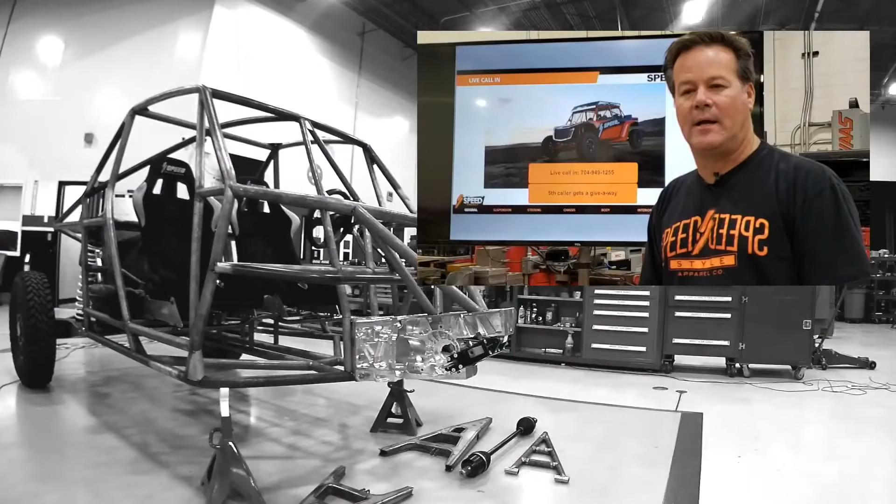But it's what it needed to be. I got to be honest, we did not focus on making the lightest components, but there are some very lightweight components. I'm going to hold up one of these hubs compared to another production hub, and I'd say we're 30% lighter just in this component. This is aluminum forged, nice spindle on it, vented rotor.

The wheels are going to be lighter than anything in the beadlock version, but not as light as a non-beadlock wheel would be, just because of the bolt weight. Shocks are for sure going to be heavier than anything in the marketplace, because it has the biggest shocks in the marketplace. I believe the OD diameter, can you grab me a tape?

Now this is an aluminum body. This part right here, it's very light. All aluminum. This comes from a forging with a, what'd you call that? I would call that an extruded housing. Probably an extrusion. Oh, it's threaded. It is threaded. Yeah, it's massive. 3.250.

The right parts for the type of riding we do. I can put a lesser shock on here if you want this lighter, a nice lightweight shock. No, it's just you're saying this motor can handle north of 500 horsepower and it's pretty reliable, and that's where I want to take the car, because the other cars out there are lighter. So to get a heavier car to go, you got to put more power in it.

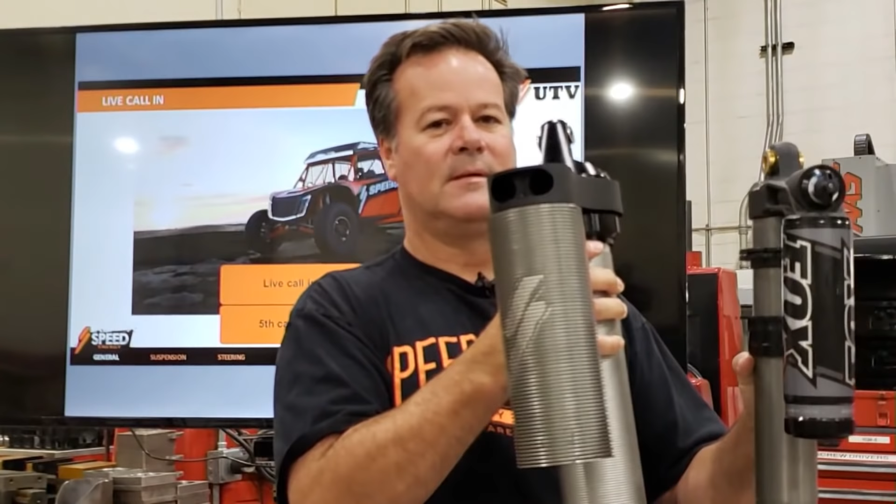So there's this. I understand there's a lot of people who want to race these things, but my thing is more just to enjoy it, go out and ride it, but still be able to go drag race it, and just have fun with a bunch of people. But my main thing is go out and beat everybody else. Well, yeah, I get that.

And this car is made as an adventure car. It's not a dune race car. Now, if you want to turn it into a dune race car, I'll have carbon fiber panels for you. I'll have billet front ends for you. We'll have tune-up kits to get you into that 500 horsepower plus range.

You can strip everything off the car, but this car wasn't just built for you or just built for me for the desert. It was built for the average guy or the average family that wanted to go play in the dunes, but wanted to have superior ride control. So when the dunes get beat up and you get all the chop from everybody riding, you need an internal bypass shock, and you need something that can handle some heat because that shock's going to be moving.

All right. I'm impressed with all your work. I'm glad for all your presentations you've been doing. You've been more informative than anything else I've ever bought out there. I just really want to thank you and your team.

I'm still number 120. I'm really excited about that. I was kind of waiting to pull the trigger. I actually waited till you left the Sandsport show, and I made the phone call. I should have called early because at the time I called, they said you'd be number like 68 or 69 car. I was like, oh. Then it turned into 120 two days later.